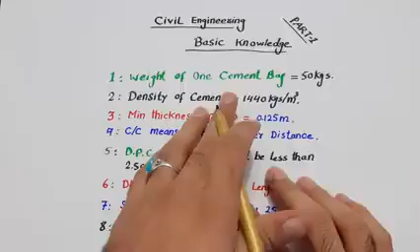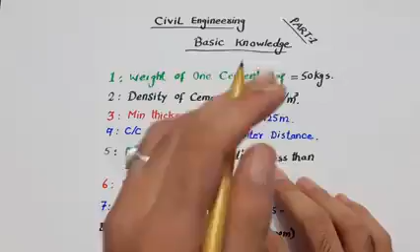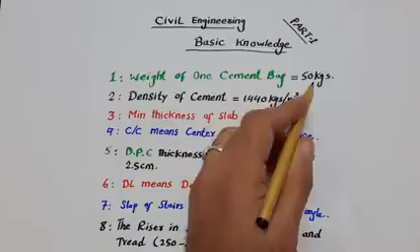The first one is you should know what is the weight of one bag of cement. The weight of one cement bag is 50 kgs.

The second one is density of cement. The density of cement is 1440 kgs per cubic meter. This is the density of cement.

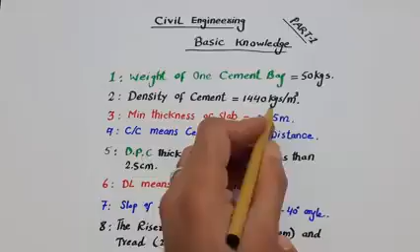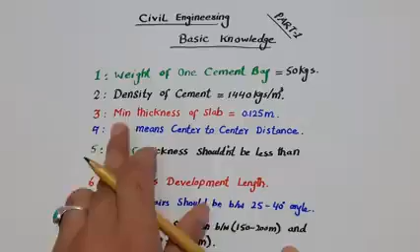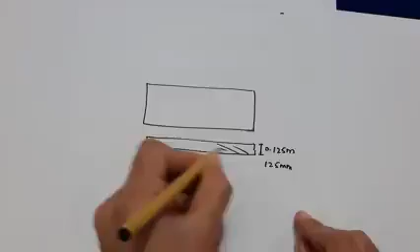The third one is minimum thickness of slab. We have about 15 points, as you can see. This is the top slab, and this is the section, cross section. So the thickness of the slab should be minimum 0.125 meter or 125 millimeters.

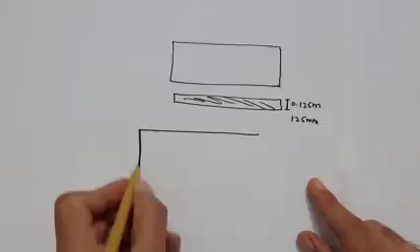The fourth one is C/C, meaning center to center distance. We especially use C/C in steel structure design for the slab or for any RCC member. For example, this is a slab, so we are providing main bars and distribution bars. These are distribution bars and these are main bars.

The space between two steel rods, we can say C/C, for example 6 inches, or C/C equals 0.125 meter, etc. So it means spacing between two steel rods.

Next, the thickness of DPC, damp proof course, which should not be less than 2.5 centimeters or 1 inch. The sixth one is DL, meaning development length.

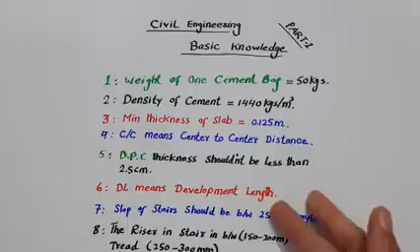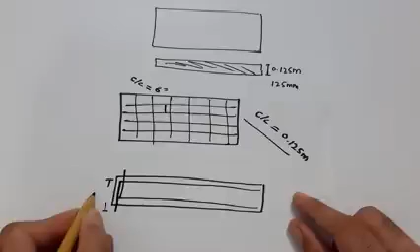What is development length? This is a beam, and inside this beam I am providing the steel rods, in long section. These are steel rods. This one steel is coming to the downside and this one is going to the upward side. So this length, from here to here, is called DL, meaning development length, which makes a good bond between steel and concrete. So at the end we are providing these.

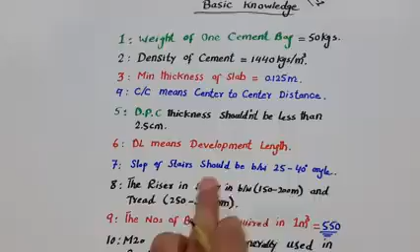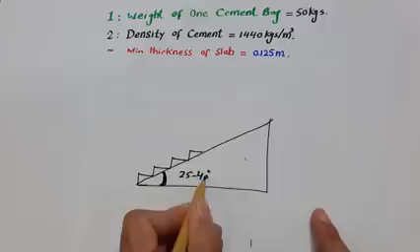The next one, seventh, slope of stair should be between 25 to 40 degrees. What does it mean? This is a wall, this is the stair, and these are steps. This angle should be between 25 to 40 degrees. It should not be more than 40 degrees, otherwise people will face more problems when using these stairs.

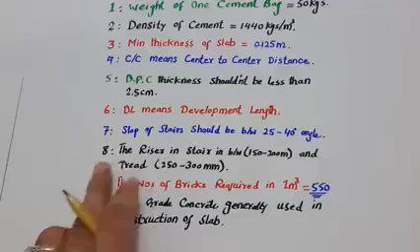Next, number 8, the riser in stairs should be between 150 to 200. Riser means, as you can see in the steps, this is called riser, so it should be between 150 to 200 millimeters, this height. And the next one, this is called tread. The tread should be 250 to 300 mm.

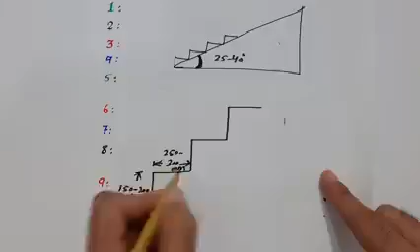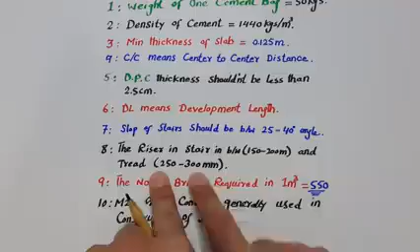The ninth point, guys, is the number of bricks required in 1 meter cube. Anyone can ask you how many bricks are required in 1 meter cube. So, 550 numbers of bricks are required in 1 meter cube.

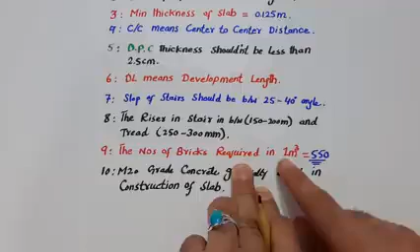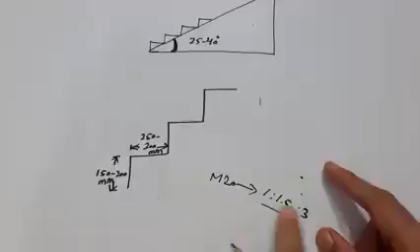Next, guys, you can see M20 grade concrete is generally used in construction of slabs. So what is M20 grade concrete? M20 ratio is 1:1.5:3. This is the ratio of concrete for M20, and it's generally used for construction of slab.

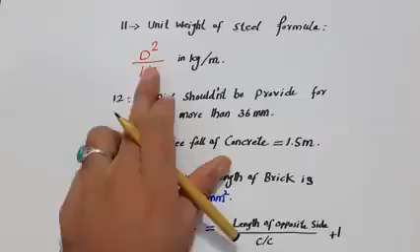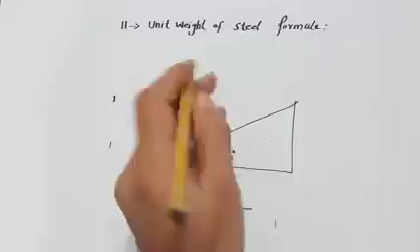The 11th point, guys, is unit weight of steel. The formula is D square divided by 162, in kg per meter. This is the weight of steel for 1 meter. So how can you find the total weight of steel? Remember, D should be in millimeter.

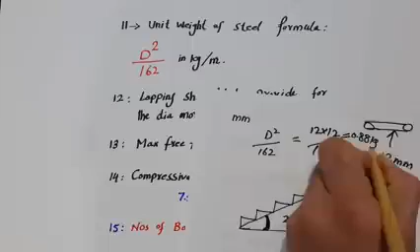For example, I am using the formula D square divided by 162. Let's take a steel rod with dia 12 millimeter. So the formula will be 12 multiply 12, divided by 162, which becomes 0.88 kg per meter. This is the weight of steel for 12 millimeter dia steel rod. You can also multiply this with the running length.

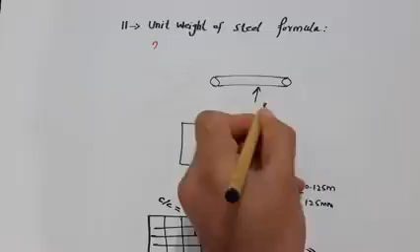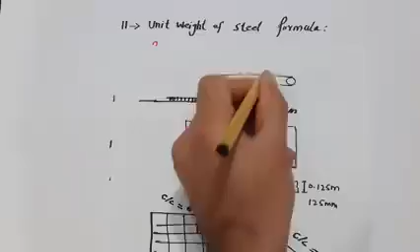The 12th point, guys, is that lapping shouldn't be provided for dia more than 36 millimeter. For example, guys, you can see this steel rod. If the dia is more than 36 millimeter, or 36 itself, the lapping should not be provided. This is lapping, guys, you can see. So lapping should not be provided for this, but less than this you can use it. For this, you can use the coupler method or any other method.

The 13th point, guys, is max free fall of concrete. During pouring of concrete in slab or any RCC member, the concrete height should not be more than 1.5 meter. So max free fall should not be more than 1.5 meter, otherwise it will cause bleeding, segregation, etc., and you will face problems.

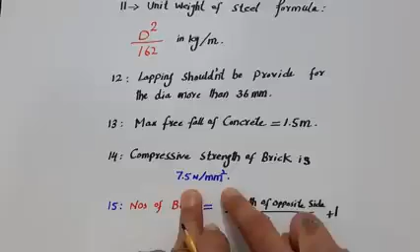Therefore, remember this point. The 14th point, guys, is compressive strength of brick is 7.5 Newton per mm square. It should not be less than this value. It doesn't mean it should be exactly 7.5, but it should not be less than that. The compressive strength of the brick should not be less than 7.5 Newton per mm square generally.

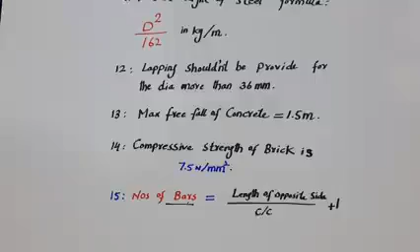Guys, the last one is number of bars. So how can you find the number of bars? For example, in a slab, take the length of the opposite side, divide by spacing C/C, then plus 1. This gives you the total number of steel rods in the slab.